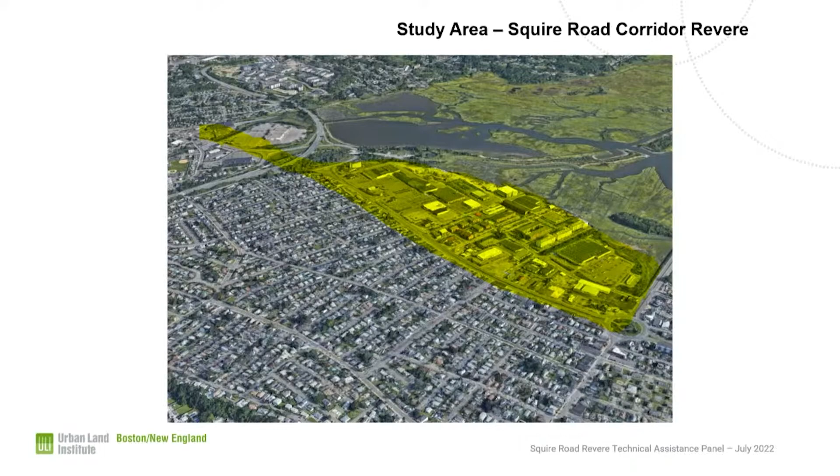In this particular TAP, we've been asked to address three main questions. These questions are really about what can happen here.

How do we enhance the area's diversification of uses? Yes, there are already diverse uses there, but it's not quite what the city is looking for, and in some of what we've heard today, not quite what stakeholders are looking for.

How do we figure out urban design goals for the area that would address its identity? What are the current uses, and what should they be?

And then thinking about smart growth, which can mean different things for different communities. In this case, we're looking at an area that has not just uses, not just a regional aspect, but also a significant environmental aspect. So what does smart growth mean for a community like that?

Rethinking green space around the area, rethinking how that enhances the surrounding neighborhoods as well as Squire Road itself, and how we link to the Northern Strand Community Path—again, local versus regional.

One of the ways to make new things happen is to rethink the existing zoning. So what do we do with the existing zoning? What recommendations would we make for that?

Next slide, please. Our process began with a briefing meeting. The city provided us with a lot of information—I think it was about a week and a half ago. So we've done a little bit of due diligence ahead of time.

With that, I'm going to turn it over to Aaron—sorry, I've got two more. My apologies, Aaron. So if we skip to what we saw, here are some pictures from our site visit. We took a couple of photos; you'll see there's a lot of pavement, and we're going to discuss that.

There's something we talk about called placemaking, which is how you express the identity of an area in physical form, and how you attract people to an area, giving them a sense that there really is something there. There's a common phrase in planning and design circles: 'there's not much sense of there.' So one of the things we look at is how to increase the vitality of an area—how to express its identity through design and physicality.

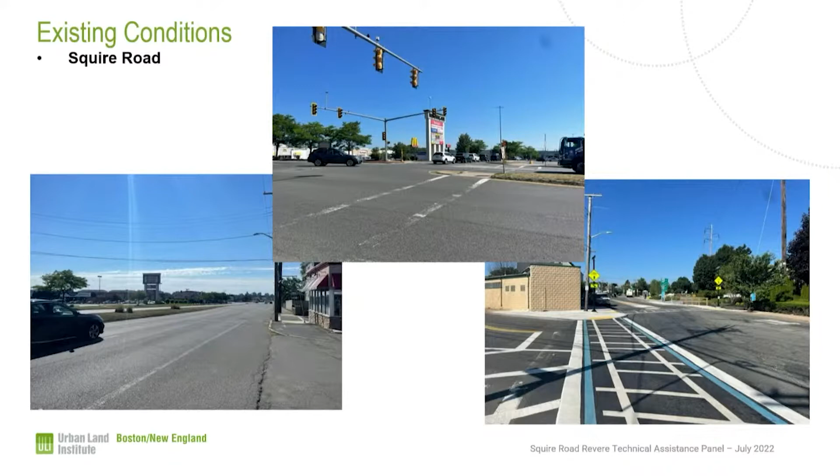How do you get somebody to come to your website and stay? It's true of a place as well. How do you get somebody to do their daily shopping and run some errands and meet a friend for a coffee, all in the same place? So we look for things like that as well. And now I'll turn it over to Aaron.

Oh, great, excellent. So we just wanted to showcase initially some of the initial themes that we heard throughout the tour, as well as the two panels that we were able to engage with stakeholders with today. A lot of these are pretty obvious, considering that the site has a large highway running through it.

Traffic being a big one, the number of cars that come here and there, people getting onto and off of Squire Road, and coming along with that, pedestrian safety, people that are looking to walk or traverse Squire Road or looking to get to the other side, the ability for cars, motorists to feel safe as they're going to and fro, is another theme that was highlighted.

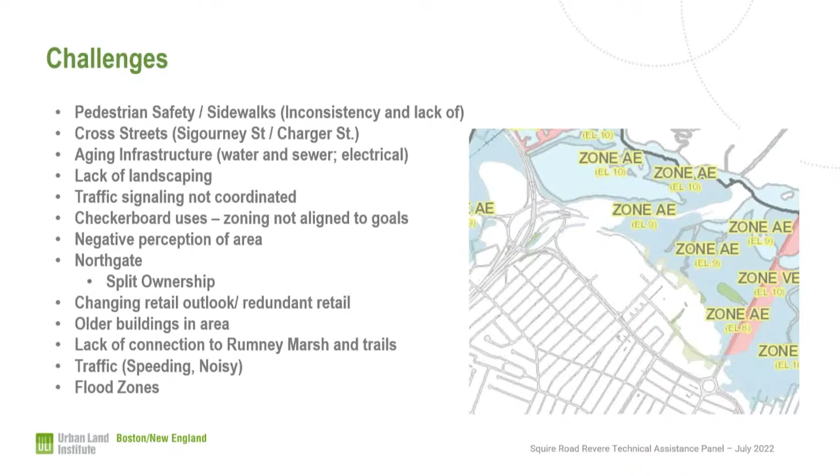On to recommendations, the next slide. We were asked three questions that Emily had introduced at the beginning, presented to us weeks ago when this application was submitted. We actually moved question 3 to question 2 because we felt answering 1 and 2 together made sense for the next steps we'll go through.

We came up with a phased approach, phase 1, 2, and 3, to identify opportunities to enhance the area's diversification, housing, retail, and outline clear urban design goals affecting the corridor's identity. There were also two sub-questions about infrastructure, roadway, transit access, and MBTA. All of those tied into our new question 2: the feasibility of reclaiming and repurposing the large green space behind the site, and connecting that with the bike path.

Phase one is really now, or yesterday, through the next three years. Conduct studies is the first part. This may be considered a study at some level with professionals coming in giving a backbone, but this is a 36,000-foot-in-the-air view of what we think you should do. These studies should look at parking, market analysis, the MassDOT corridor review, hydraulic study, and an area master plan.

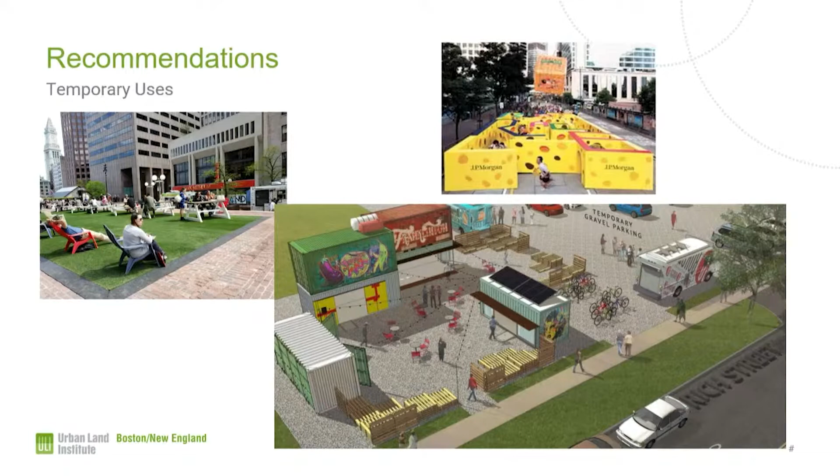Yeah, exactly. And this is all, again, phase one - the beginning phase. There's a lot of planning to do, a lot of beginning streetscaping, cleaning up, and drawing attention to the area. I'll turn it over to Drew, who has the tougher job of phase 2 and 3, putting bigger plans into action.

Great. So after that extensive planning and community engagement effort in phase 1, phase 2 is about beginning to implement some of those exciting designs and changes. First, we're focused on a redesign of both the above-grade and below-grade infrastructure on Squire Road. I think there's a lot of opportunity there. We found that the existing MassDOT public right-of-way is anywhere between 100 and 120 feet, and there's great opportunity to design a road diet that will also allow for landscape buffers, pedestrian improvements, and opportunities for cyclists.

As well as addressing some of the concerns we heard from community members and city officials, primarily related to pedestrian safety, vehicular maneuverability, as well as stormwater runoff. Some of those landscaped areas could act as rain gardens, but also as noise and pollution buffers from all the traffic that moves through Squire Road and surrounding corridors on a regular basis.

We want to promote enhancements and connections across Squire Road. There are only 2 crossings of Squire Road today, which leads to a lot of traffic and congestion in the surrounding neighborhoods. By creating more connections from the southern side to the northern side of Squire Road, you're able to provide safer crossings for pedestrians, slow the rate of car travel through this corridor, and make it more appealing to people looking to shop or spend time in this area who aren't arriving strictly by car.

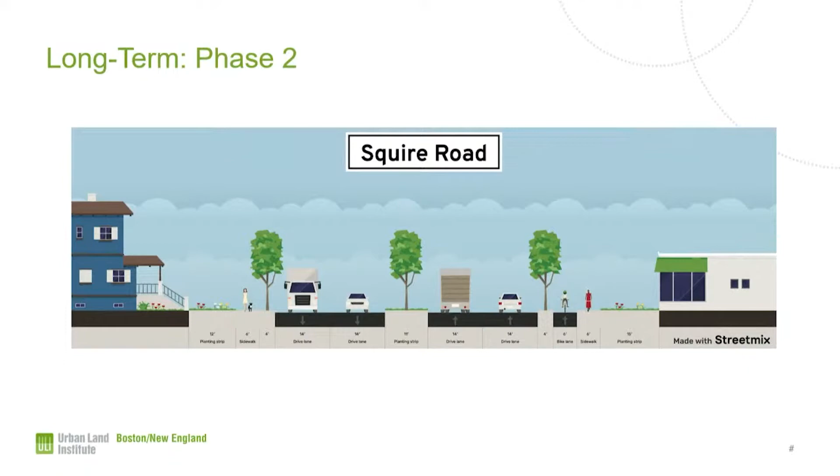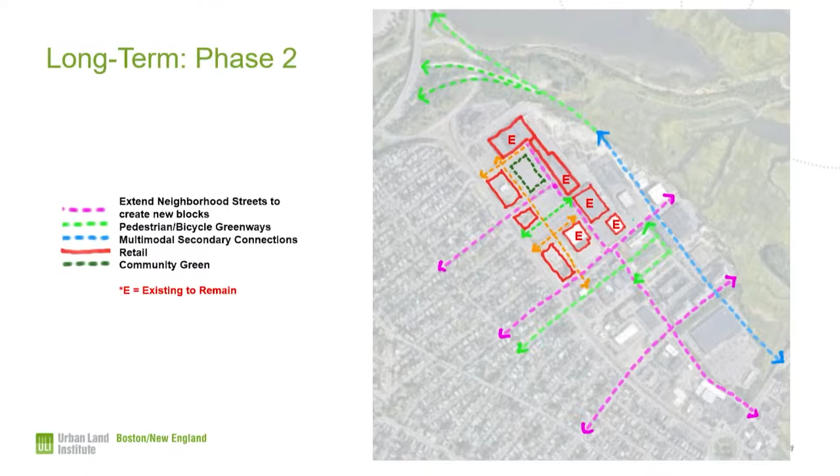We also highlighted all of the success and excitement around Night Shift Brewing in Everett, as well as the Steelcraft Container Park, which is an activation of a hardscape space with temporary structures to bring people, excitement, and entertainment to an existing location.

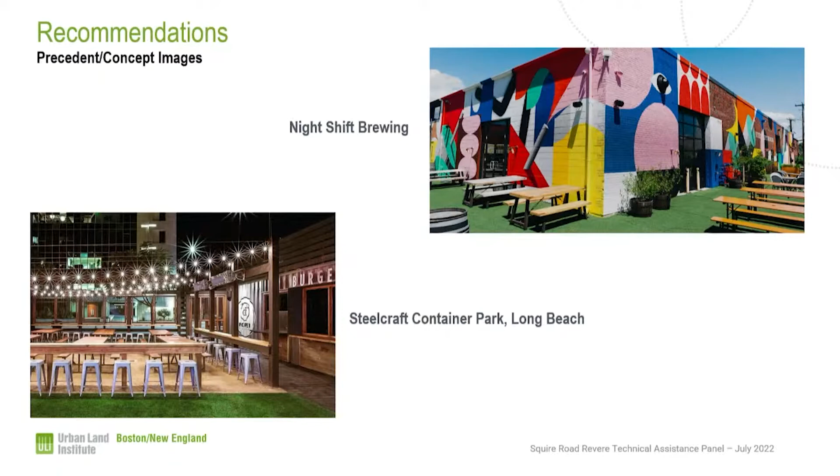As we move into phase 3, we build upon those initial connections and roadway improvements that are built in phase 2, and we promote additional development uses. We know that existing property and business owners need to see that there's an opportunity for them as we propose change in the area. So we look to activate these spaces with ground floor retail and community uses while proposing office, lab, and residential spaces on the floors above.

This would also come with enhanced community improvements, which includes the town common and park adjacent to the Rumney Marsh, and the full connection to the northern strand.

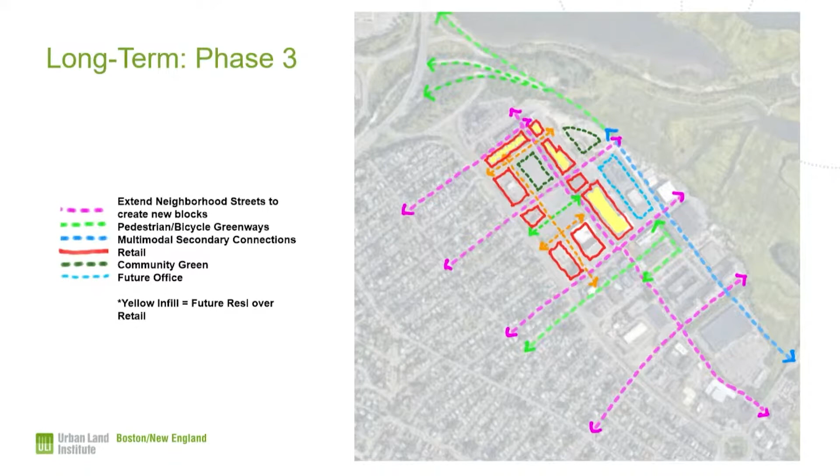Regional precedent images and opportunities. We looked at the redevelopment of University Ave, also known as University Station in Westwood, which we feel has a lot of similarities to Squire Road. As you see in the site plan, they have big box power center uses towards the rear of the site, but they brought smaller, more walkable retail closest to University Ave with a landscape buffer and pedestrian improvements, breaking up otherwise a sea of parking. We would envision something similar to University Ave as part of a phase 2 improvement.

As additional development takes place and the street grid is built out, we see Assembly Row as a strong precedent example for this part of Revere, where you have park space and community and regional connections closest to the Rumney Marsh. In Assembly Row, it's the Mystic River. You have a mix of retail, entertainment, housing, office, lab, and parking in structured garages, not in surface parked opportunities, and a variety of density and heights that is pushed furthest away from the existing residential neighborhoods that exist in this part of the city.